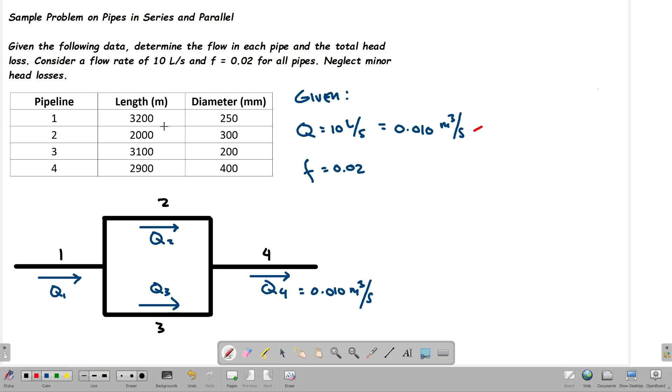So ito yung tabulated na data natin for the 4 pipes na nandito sa figure natin. So meron dalawang pipes dito na naka-parallel, pipe 2 and pipe 3. Tapos naka-series na sila with pipe 1 and pipe 4. So ito yung mga details na given. We have length and then we have diameter for pipe 1 and so on and so forth. So ito yung i-analyze natin.

So sa solution, ito yung mga ginawa na natin para hindi na masyadong mahaba yung video natin kung magsusulat pa tayo. So dito sa system natin, of course, kung ano yung papasok na Q, yun din yung lalabas. So equal lang si Q1 tsaka si Q4, which is equal lang dun sa given na flow rate sa system natin, which is 0.01 cubic meter per second. Tapos since magbe-break yung Q1 natin into Q2 and Q3, si Q1 is just equivalent to yung summation ng Q2 and Q3.

And similarly, dahil mag-unite sila ulit, mag-merge sila ulit papunta dito sa pipe 4. So same din, Q4 equals Q2 plus Q3 kasi naka-series yung connection ng Q1, itong Q2 and Q3, tsaka yung Q4, okay? Again, pag series, equal lang yung Q natin. So ano yung nagpo-flow dito sa pipe 1, equal lang dapat dito sa system ng parallel na pipes, and then equal lang dito sa Q4. So that's continuity of mass, or continuity ng flow.

And then for pipes in parallel, yung pipe 2 and 3 natin, cumulative naman yung Q, pero equal yung head loss. So kasi parallel sila, equal yung head loss ng pipe 2 sa head loss ng pipe 3. And then kung i-compute natin yung total na head loss, meron tayong head loss dito sa pipe 1, tapos pwede natin kahit ano lang i-consider, either pipe 2 or pipe 3. So dito pipe 2 yung nilagay natin. Equal lang din yan. And then dapat ito ay 4, so this supposedly HF4.

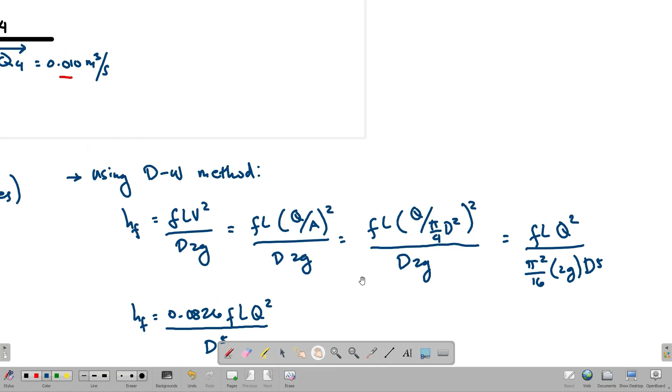So using the Darcy-Weisbach equation, ito yung equation niya, fLV squared over D 2g. Since Q naman yung binigay sa atin, hindi na natin gagamitin si V. Ita-transform natin siya sa equation na Q lang yung magagamit. So velocity is just Q over A, tapos A is just pi over 4 D squared, tapos square mo yan. Tapos pag i-evaluate natin yung pi squared over 16 times 2 times 9.81, tapos 1 over, magiging 0.0826 na yan.

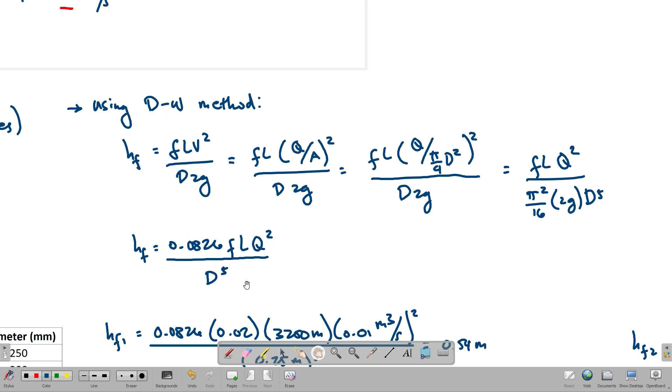So i-try lang natin dito sa calculator para ma-confirm natin. That's pi squared times 2 times 9.81 divided by 16, tapos 1 divided by answer. So that's 0.0826. Tapos meron kang f, L, Q squared, and D to the 5. So ito yung general na equation natin for head loss as a function of f, L, tapos Q. Hindi na siya velocity, okay?

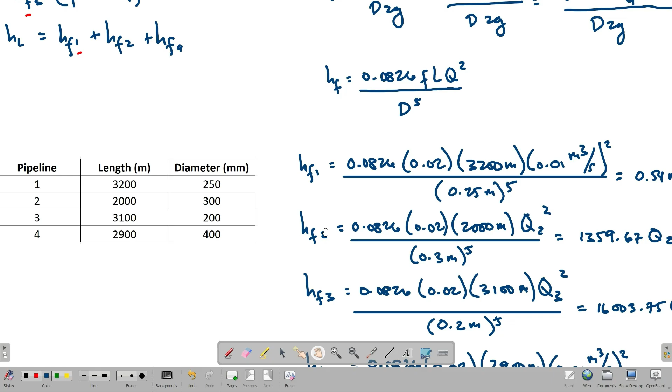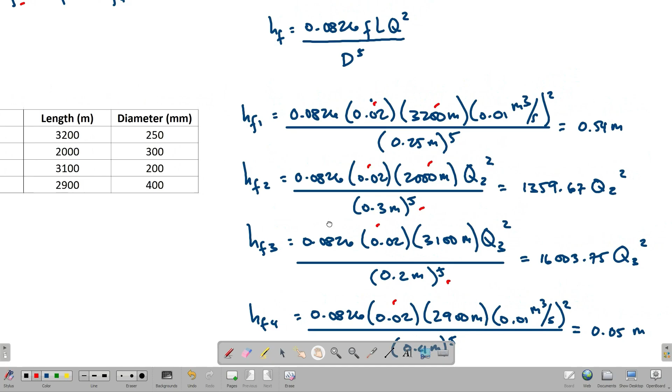So given the tabulated na data, substitute lang natin yung mga values natin. Same lang lahat si f sa lahat ng equations natin, 0.02. Magbabago lang is yung L kasi iba-iba sila ng length, at yung diameter. So for Q1 and Q4, same lang sila. So meron tayong values for HF1, 0.54, tsaka 0.05.

So, evaluate lang natin si HF1 muna. That's 0.0826 times 0.02 times 3,200 times 0.01 squared divided by 0.25 raised to the power of 5. Dapat 0.02 to. So, 0.54. Tama naman. Tapos, si HF4 naman, we have 0.0826.

0.0826 times 0.02 times 2,900 times 0.01 squared divided by 0.4 raised to the 5. That's 0.0467 or pwede natin i-round up na 0.05. So, ito yung mga values natin. Confirm naman, no? So, i-check na natin yan. Confirm. Dito naman tayo sa head loss ng pipe 2 and 3.

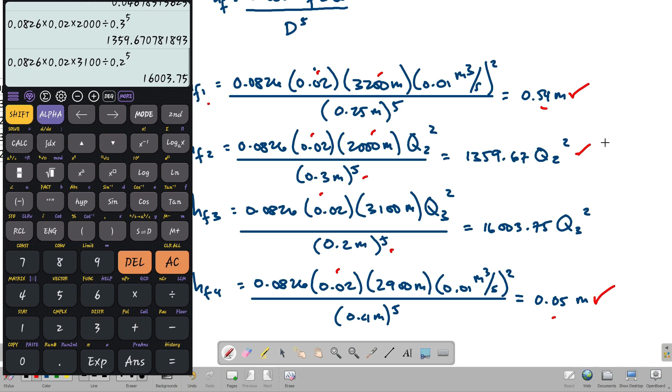Evaluate lang natin na 0.0826 times 0.02 times 2,000 divided by 0.3 raised to the 5. That's 1359.67 Q2 squared. Tama naman, no? Confirmed. Ito naman sa next. 0.0826 times 0.02 times 3,100 divided by 0.2 raised to the 5. So, 16,003.75. Yan, tama naman, no? Confirm. Okay? So, ito na yung mga equations natin for head loss para sa each pipe.

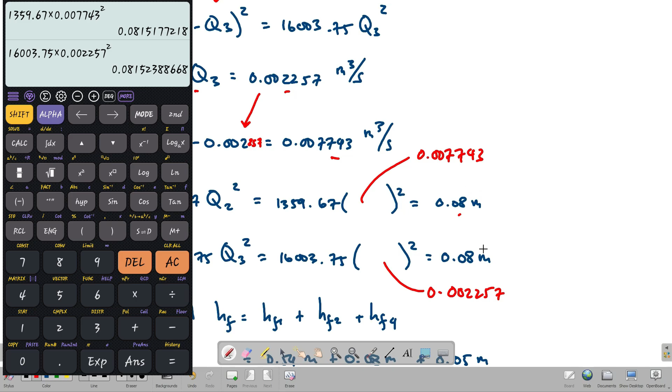1359.67 times 0.007743 squared. That's 0.0815 or 0.08. Pwede na, no? And then we have 16,003.75 times 0.002257 squared. And then 0.0815. Pero 0.08 lang yung kinuha natin. So, pwede na yan. Equal silang dalawa. Equivalent. Therefore, pwede lang either yung gagamitin natin for getting the total na head loss.

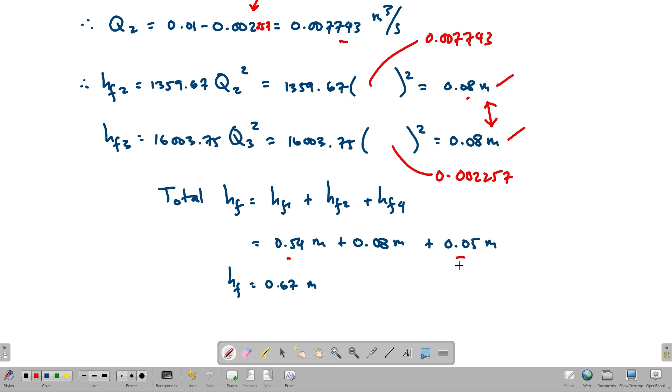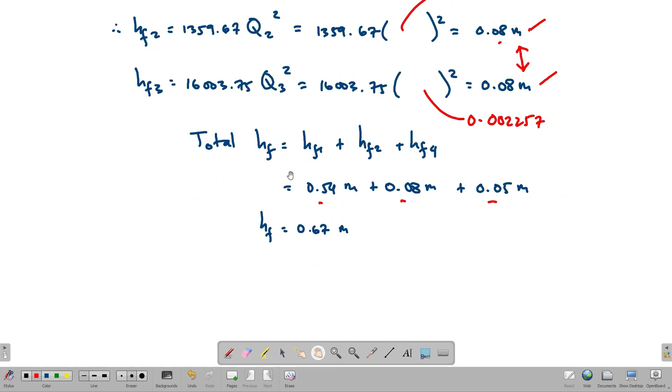So we have the total head loss is HF1, HF2, and HF4. Tapos i-add up lang natin lahat ng mga values na nakuha natin. 0.54 and 0.05. So yung total niyan, that's 0.54 plus 0.08 plus 0.05. That's 0.67 meters. Okay? So ito na ngayon yung final na total na head loss, which is confirmed naman.

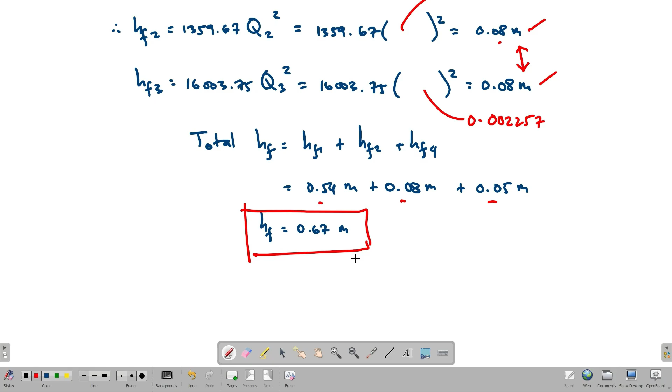Dito sa Q pala, yung mga discharge natin, Q3 and Q2. Since sobrang liit na mga values natin pag naka-cubic meter per second, tina-transform natin siya into liters. Times 1,000, that's 2.26 liters per second. Tapos, si Q2 naman, pwede na siyang gamitin as naka-liters. So, we have 7.79 liters per second. Okay? 10 liters per second yung total natin. So, this is equivalent. 10 liters per second yung total na flow natin.